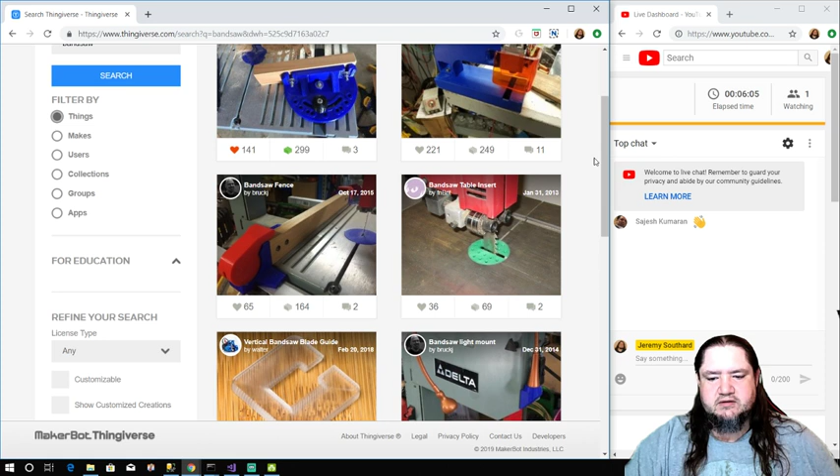So I was thinking, oh, I could design a throat plate for it. But then I thought, well, let me just check and see, Craftsman bandsaw throat plate, if there's something on Thingiverse. Well, the thing about Thingiverse, when searching for things, sometimes you can be too specific on the searches, right? So if I just search for bandsaw, now there's all kinds of things that came up. So here's a table insert, it's not for the right bandsaw, but this one is. So a little over 4 years ago, someone designed the file, and that's what the top of my bandsaw bed looks like. So I didn't have to design it myself, and that's the really cool thing.

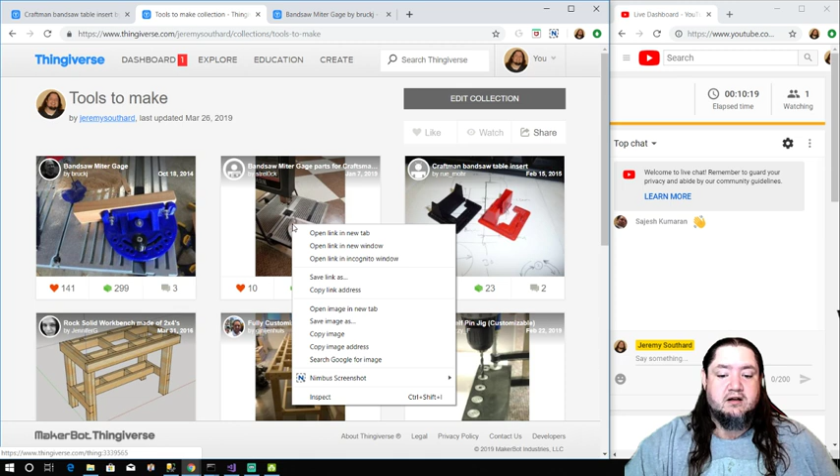Also, my bandsaw does not have a miter gauge, and there was this miter gauge here that this guy designed, but for a different saw, which is fine. The actual miter gauge piece would work except for the track. Well, somebody else already designed the appropriate track for it. I think this is a remix, yeah, a remix of the other gauge. And he says just print the angled piece that rotates, that angles and holds the material in place, and here's the track for it.

So if I decide to make like a circle cutting jig, and I need to utilize the track space there, I could print this track piece. It doesn't just have to be for the miter gauge, right? I can print that track piece and use it for other things I want to use on the bandsaw.

Let me go back to the collection. So there was a couple other ones I looked at before. You know, I have a Ryobi table saw, but it doesn't have the miter gauge either. So here was one that had the proper sized rail.

This featherboard, I printed one of these already in red. I didn't have the right track piece, which is why I found the other table saw tracking. But you know, this is great. Featherboard was like $30, I think, last time I looked them up, and this is less than $1 in plastic. So I have to have the $200 printer, but you know, it's saving money.

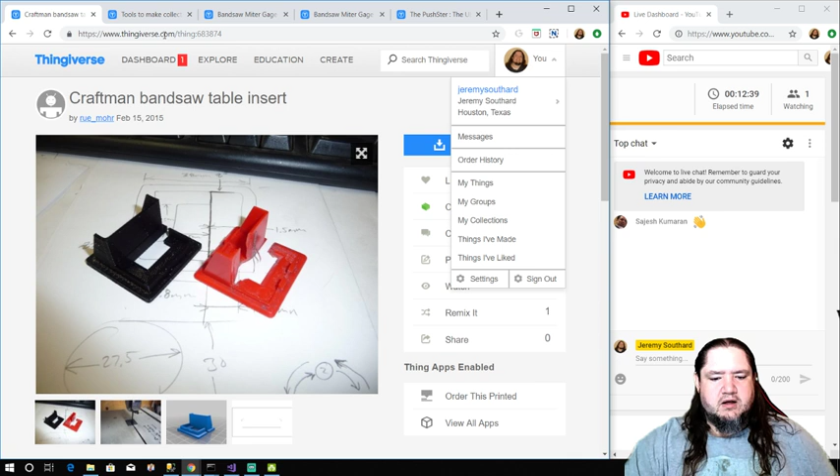So there's a company called Micro Jig, and they create a thing. They have a thing called the gripper, and I saw it at Rockler, and maybe at Woodcraft, I'm not sure if they had it too, but it's this cool - let's see, no, not that one - it's this cool tool that you can use when pushing wood on the table saw so you don't cut off a hand, right? So let's see if this guy has a good picture of it.

Well anyway, basically you've got the blade. Let me see. Micro Jig. Yeah, it's like this picture here.

You know, cutting the small piece of wood, you don't want to be right up on top of the blade. Fingers are important to keep. So what this does, it has an adjustable - that was weird, that was going to make it bigger - adjustable centerpiece, so you can see the side leg is holding the piece to the right of the blade, and this is holding the center of the blade, and this is pressing up against the wood so it's not slipping out the other side, kind of like a featherboard does.

And you just push it along, everybody's hands are safe, and if something happens and the blade catches the gripper, you know, you're still going to be okay.

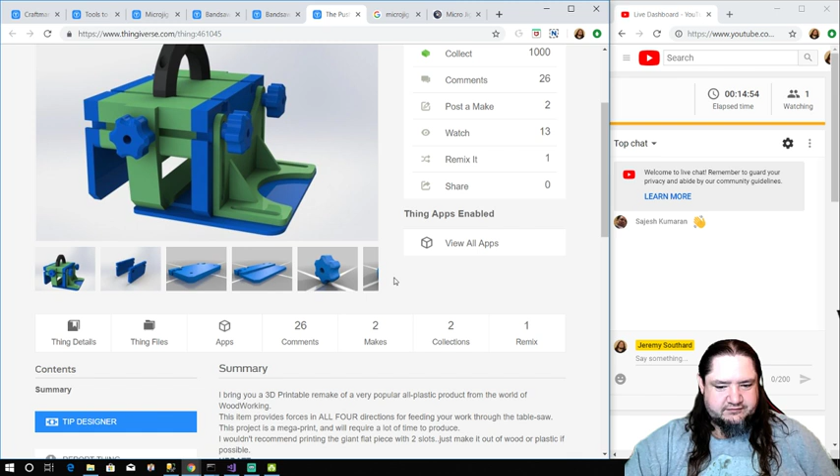So there are a couple of different clones. Here's one, they called it the PushSter, kind of like the gripper, right? And it's got a handful of pieces, and there's a few bits of hardware you need, a couple of, I think, a handful of screws. Let's see.

Well, it doesn't say right here. It might be in the thing files. See if there's an assembly guide in here. Nope. Well, it's not that many, it's like 8 screws or something.

You can see people made them, and even if it took an entire spool of plastic, which it wouldn't, that's only $15. Economically, you make 2 of these, say they're $3 apiece worth of plastic, and one gets destroyed on the saw, you make a third one, you're still out less than $10. If you purchase two of them, it's $160. If you have to purchase a third, you've gone over the price of a 3D printer. So economically, if you print basically 3 of these, you've paid for your 3D printer, and you're protecting your hands, which is important.

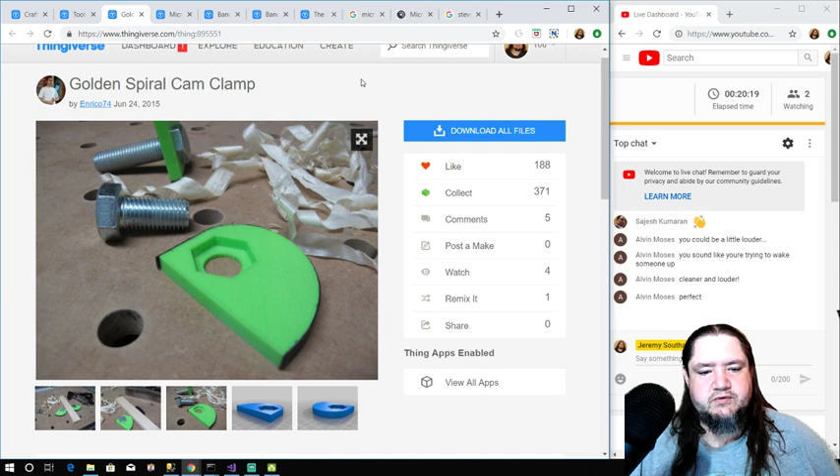So let's see, actually I wonder, I'm not sure what it's. Okay yeah, dog hole peg works out. So here's some different pegs for workbenches, bench dogs. And this one says it's customizable. I like the squares, gives a nice straight block, right? Most of the dog hole pegs are round. I actually turned one on the lathe as a test. I've got a little tiny table with some dog holes in it, like a tool table, and I've used it a few times, but it obviously had a round top that it pushed up against.

Let's see, Tiger says they're generally friction based. Oh yeah, you mean going into the hole, and then it's in the hole, and the thing pushes against it, it's not going to pop out or anything. It's not screwed in, right? Yeah, looking at this particular picture, because it was using the bolts, I thought that maybe it was screwing into something, and from this image I don't think it is, because it doesn't actually look like there's any threading inside there.

But let's see, this says it's customizable. Let's look at this in the customizer and see what kind of stuff can be customized with it. Okay, head type, rectangular or round. Let's see if this image will load.

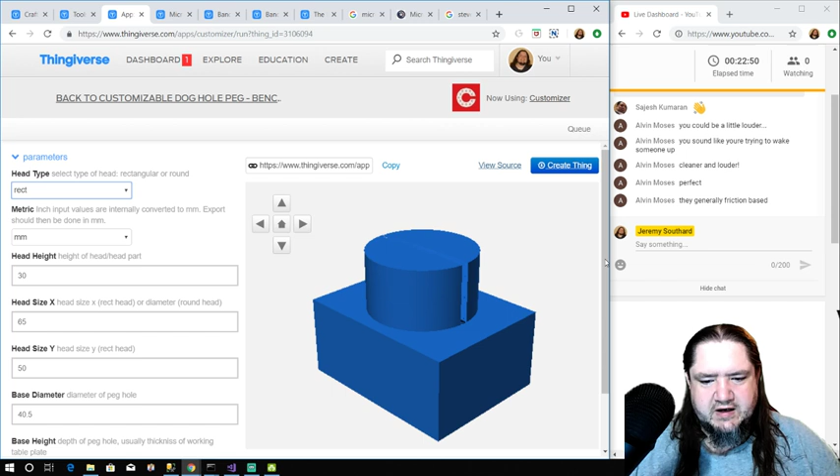So if I had a specific need, let's do a base height of like 120. But if there was a specific peg I needed for something, I could come in here and set up the parameters and 3D print it out, and then it would be good to go. So that's pretty cool, I think I'm gonna save this one in my collection as well.

Let's see, there's another customizable one that looks like it's got a bolt in the bottom. I wonder if it prints in two pieces. Oh, that's cool, yeah, so is it a single piece or two pieces? Okay, it is a single piece, but you pause between layers 31 and 32 to drop the nut in.

That's fancy. So drop the nut in like that, and then it finishes printing the rest of it. And then I guess the bolt goes in. That's neat. Let's see, inspired by QWAS dogs, let's see what those look like.

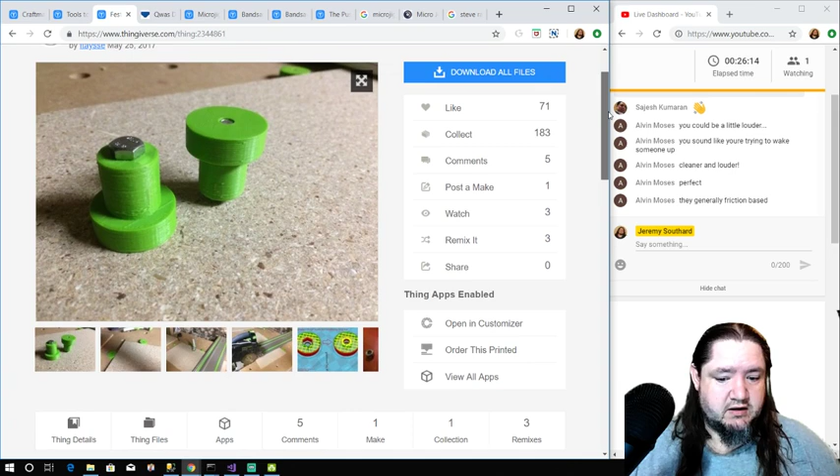Let's see. Holding a workpiece, test the squareness of a workpiece, help in gluing, a small shoulder. Interesting, yeah, I don't know. Tiger, do you have any idea the purpose of the bolt on these?

Let's see, don't have an MFT table, try this. Here's something else in Thingiverse, an MFT DIY drilling jig. That's neat, so it's going to space everything out at the proper widths. So, and that setup is cool too.

Looks like once you get the holes going, this peg piece drops right in, so that it lines it up for the next one. That's cool, let's see. Yeah, so there's half a peg there and two other pieces.

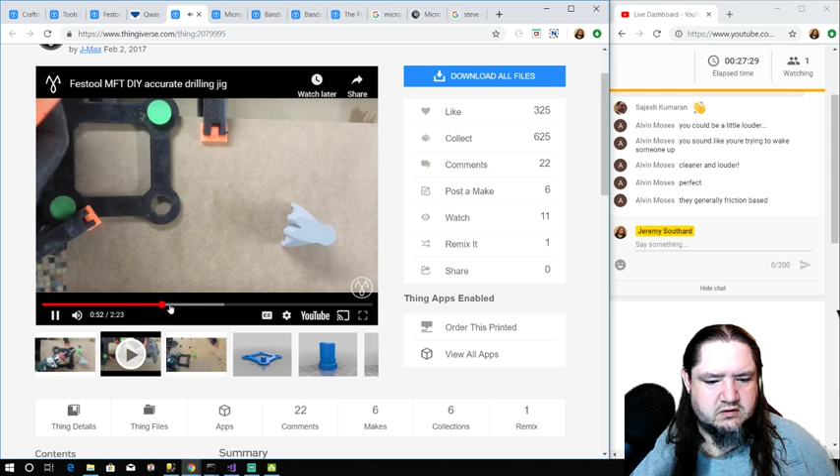Okay, so it lines up for the first hole, clamp it down. Oh, and there's even a jig for aligning the drill bit, that's cool. And then plug it in. Nice, well that's cool, I'm gonna add that to my collection too, that way I'll have the jig whenever I get ready to make the tabletop.

So let's see some other things I've seen in here. These different sanding sticks are pretty cool, different shapes and lengths with the sandpaper attached to them. And then it screws down to get into the different tight places, like the curve on that one, to get inside of a curved area.

Let's see, make sure everything's still running right here. So, and then here's some 90-degree angle clamps. You know, I needed some of these before. I ended up using a piece of wood from Rockler that I was going to use on the lathe, but they're cut really, really flat, really straight 90-degree angles, so I used it as a stop block in the corner.

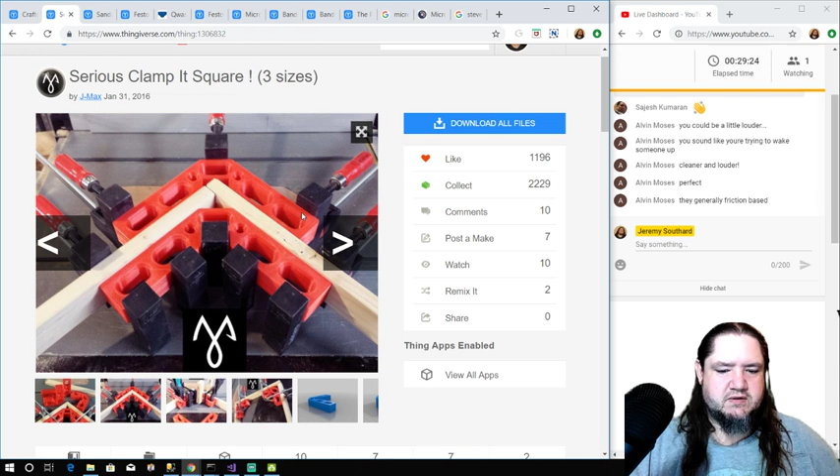Oh nice, inside and out with the F clamps. I didn't see that picture before. But, so again, you know, for some, let's see, wood corner clamps. Yeah, these are $10 a piece, and these would probably take an hour to print two of them.

Maybe 30 cents worth of plastic, if that. It's got the holes in the middle for the gripping using the C clamps or the square clamps. That's pretty cool.

So anyway, there's all kinds of neat stuff. If you know, you don't have to immediately go and design your own thing, you can search for it and see. And that's where we started down this path here with the bandsaw insert. I knew I needed one, and was gonna, like I said, probably spend an hour working on it, but there was already one here.

So that's pretty cool, I think that's enough looking around in Thingiverse for now.

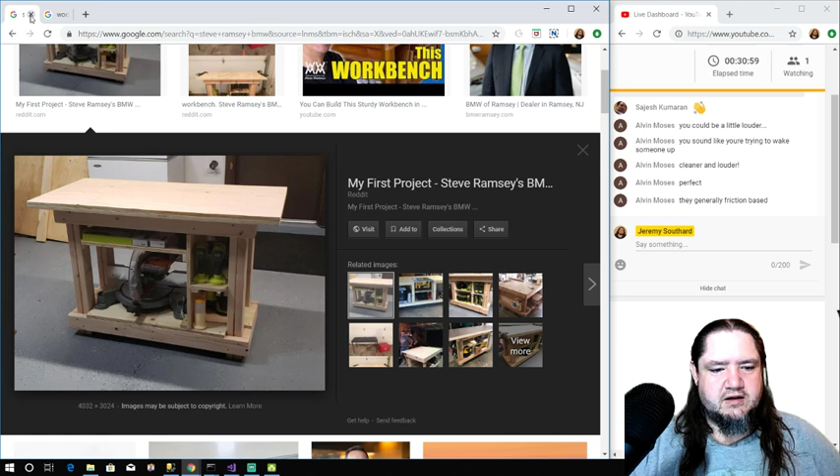One of the other things I've noticed with a bunch of the YouTube videos with the woodworkers is most of them have a brand with their logo or their name, so that when they finish a piece, they can brand the bottom of it.

And I'm working on a couple of things right now that I hope when I'm finished, I would like to have a nice brand to put my mark on the bottom of it.

So one of the things I was looking at with Tiger the other day was there's these brass rods you can get on Amazon, and I saw a video where a guy took the brass rod and carved out the design for the brand he wanted. And Ken at the Makerspace has started doing some metal forging. He made a little forge, and I think melted down some aluminum and a few different things.

But Tiger and I were talking about that. Instead of getting the brass rod, we could actually design something, 3D print it, make a mold from that, and then melt down some brass and pour it into the mold.

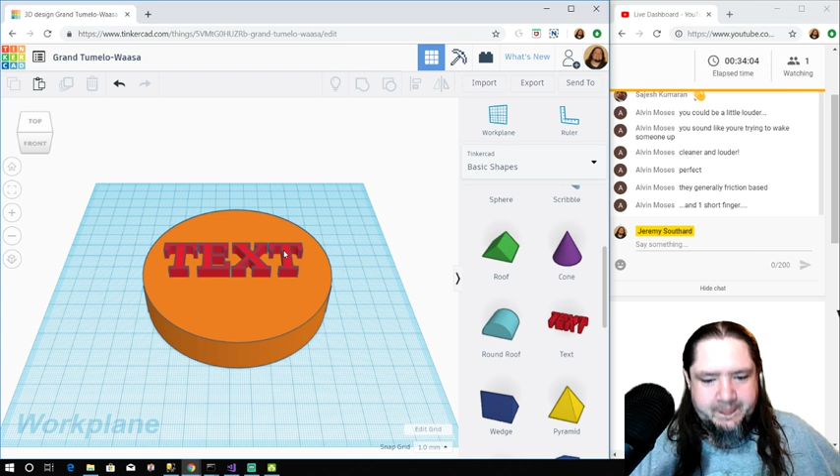So one thing to consider here is it has to be a mirror image, and with designing it in 3D, that's a little bit easier to do it in the correct orientation and then mirror it, as opposed to trying to carve it out and potentially forgetting about the mirroring and making the E the wrong direction, which is probably something I would end up doing. But here in Tinkercad, it's real easy to mirror something like that. See, just one click, and now the word text is mirror imaged.

So this would be 3D printed, and then pressed into molding clay, and then the brass could be melted down and poured into the mold. And then from there, the brass end could be attached to a handle of some kind, and then it's heated up and pressed into the wood to leave the burn.

Now there are some branding irons like this. So here's some on Etsy. This is a custom branding iron, $8 plus, so that's only the iron. I don't know what some of these options are here, but the cheapest actual iron is $30 with 2.5 centimeters, so that's about an inch wide, going up to 15 centimeters, which would be about 5, 6, 7 inches wide or something.

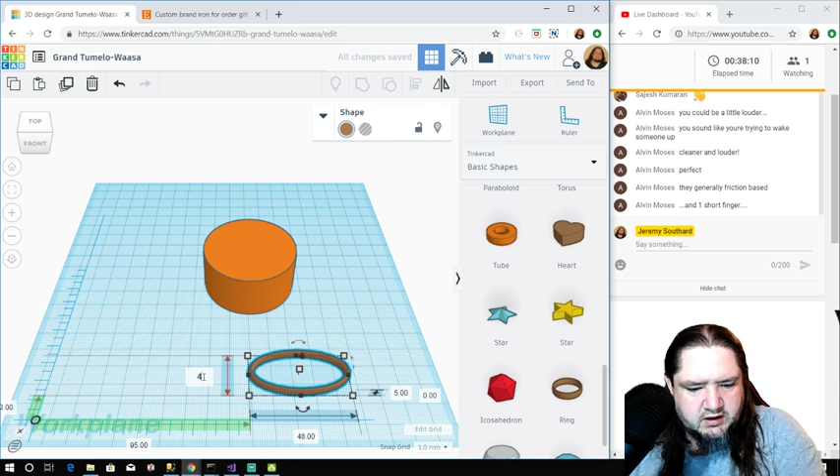Let's see, I'm going to do a ring circle around it. I went to 50, didn't I? So let me go to 48, 48. Oh, that's cool, I didn't realize the ring was a custom shape that could be adjusted. That's neat. Undo, okay.

Let me align these two. Yeah, 24 sides, that's the maximum. I'll leave that as a circle for now. Bring this down here. Yeah Tiger, I saw the octagon, that looked pretty cool. I'm going to leave it as a circle for now, just to have the area here to work with. And I think I want to put this back to make this the same width, and realign those.

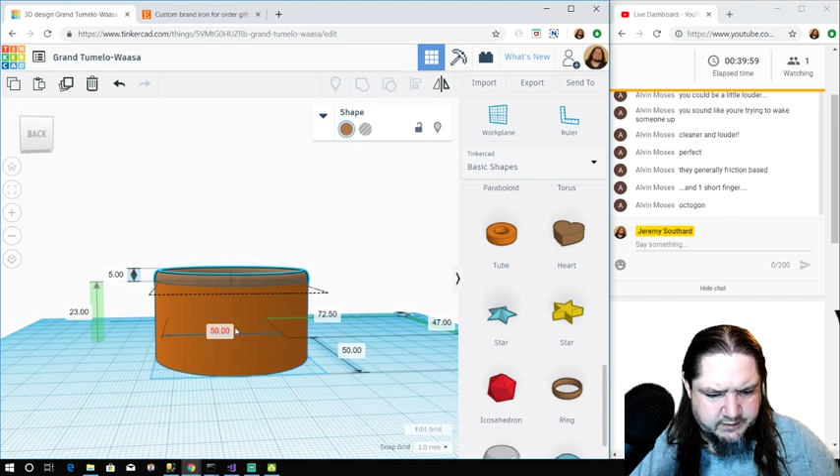And it's 5 millimeters tall, and that looks to be about a half. So 2.5 millimeters above the plane there.

Tiger says, make it thick enough. If you drop it and dent, it won't chip out. Well, I'll want to cast 2 or 3 of them just in case as well.

Now I'm not sure if I can make the text. Yeah, it's fine. I've had problems before with the fonts not exporting in the same way that they look inside of Tinkercad.

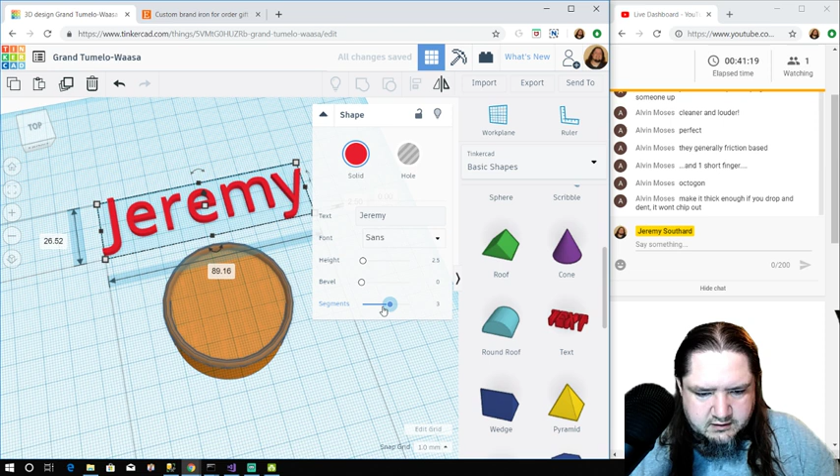But, oops, wrong mouse. Segments aren't doing anything. I'm going to move this over here. Whoops. Let's see if I go down to... Nope, I didn't want that to crunch inside.

Let's see. I feel like that's not as thick as I thought it was either. Let's see if I can align these together at the top.

Let's see, is there a way to hide this right side? Yes. Okay, that's better. Let's see, so that's still 1 millimeter above the bottom plane. So that's going to have to be a height of 6.

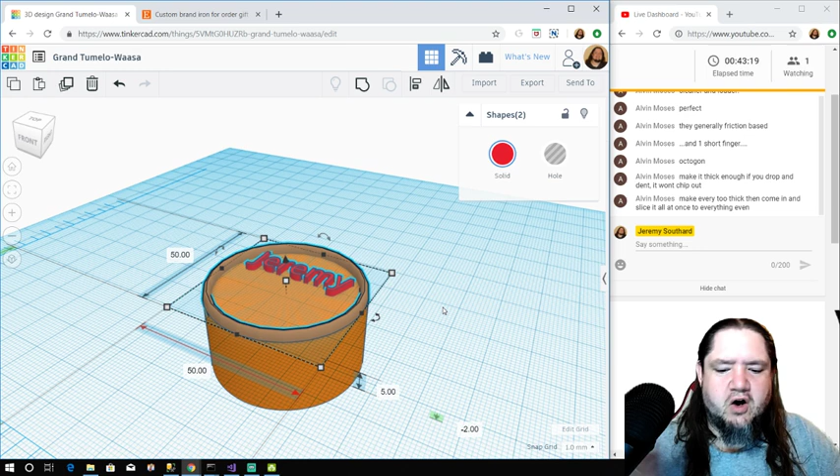So I will... Where did the settings go? There we go. So yeah, make it super tall. And I think instead of the ring, I'm going to do another cylinder.

Come on. It's not wanting to line up. I'll do another cylinder and then make a hole.

Sometimes this alignment stuff is funky. There. Bring that one way up. Copy it again.

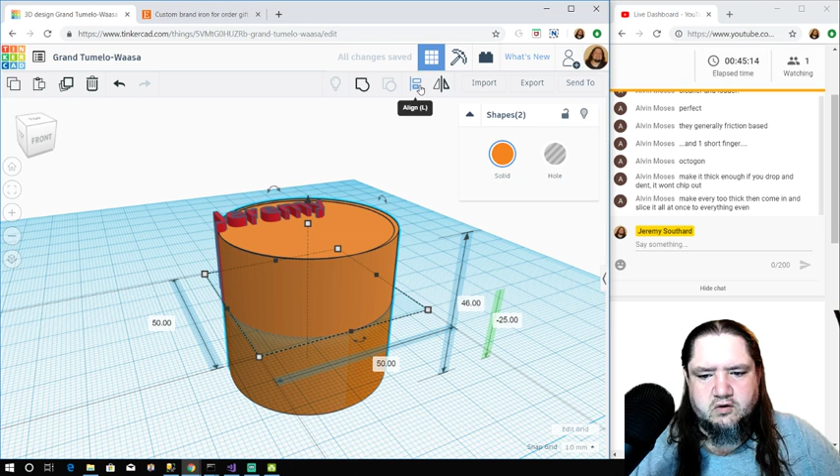Make one of these just a little bit... 48... realign with the outside and make this one a hole. Group those two.

Line it up there. I was also thinking about, I have a lettering kit and I think they're made of steel. I'm not sure if those could be heated to do like a date.

For like a date or a piece number or something. You know, if I make 10 bowls, I could label them as a set or something like that.

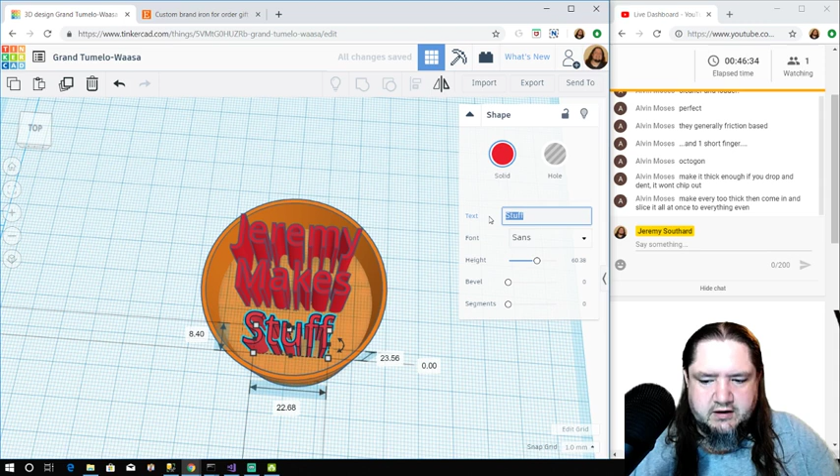Oh, you know what? I didn't do it in all caps. Thought something looked weird. Tiger, I know you like to tease me about the caps.

Let's see if I center, oops, the word makes. And let me grab stuff. 1, 2, 3. And this one, 2, 3.

That's pretty cool. There's still a little bit of room here. Let's see what else I can add at the bottom.

Some kind of a little flourish or something. Yeah, I'll flip them after we cut it down.

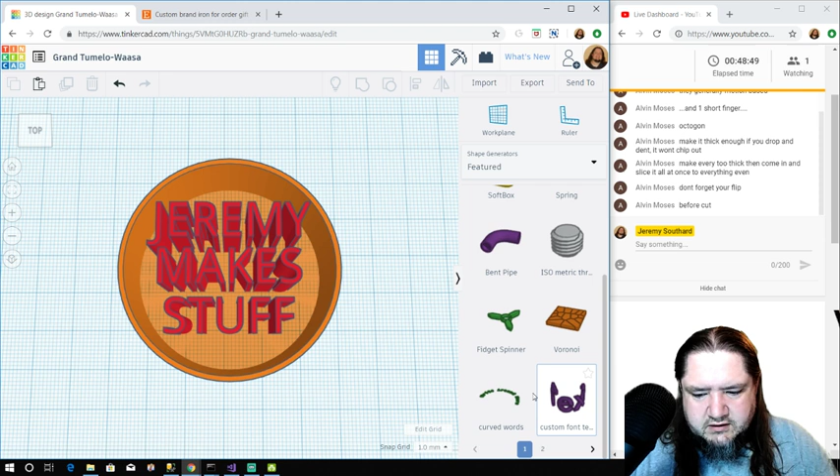I guess, yeah, the cut should be the very last thing that happens, right? Oh, there's curved words. Let's see, what would that look like? That would get too big real quick, I'm sure.

Let's see. Drop that out of there again. Lock those.

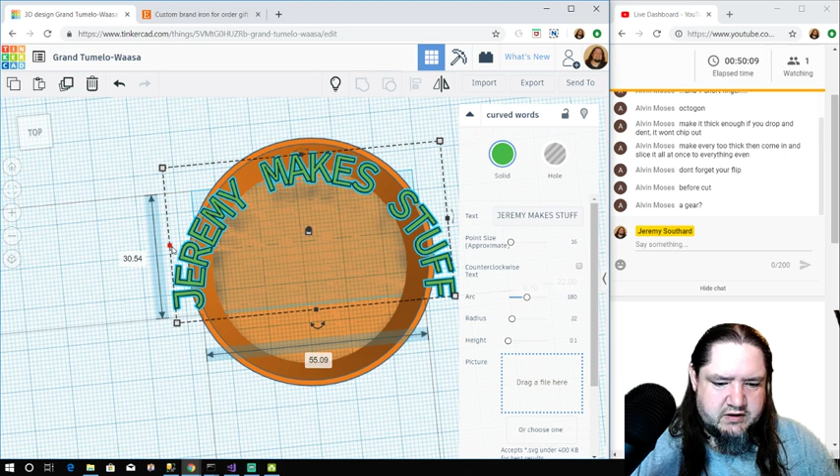Yeah, maybe a gear or a... and then bring the teeth to a point. It might kind of turn out like a saw blade. So yeah, this is a little too squished to be inside of a circle.

Let's see, I know there's some gears in here somewhere. Are there? There's pages on some of these. There we go. I wish there was a way to search.

And Tiger says put 2019 at the bottom. Maybe. Like I said, I want to look at that lettering kit again too and see if maybe I can use that to do dates and things.

That's too far. Can't quite get those pointed. So more teeth is closer.

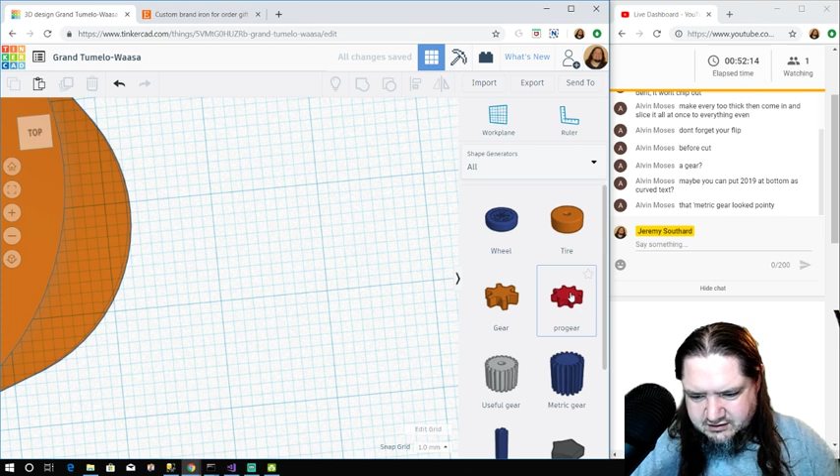It kind of looks like a good job sticker from kindergarten. Let's see, that metric gear. Oh yeah. Oh, and that has a pitch on it too.

I feel like I'm really zooming in close. I don't know what this module means. Oh, okay, that's like diameter or something. Or some calculation with height and diameter.

What just happened? I think I clicked. Let's see. That's kind of saw blade like. What? It's like it's changing.

Let's see, add a bigger circle and leave the pointy bits. Let's definitely want to take a circle out of the middle, right? And see, it changed again.

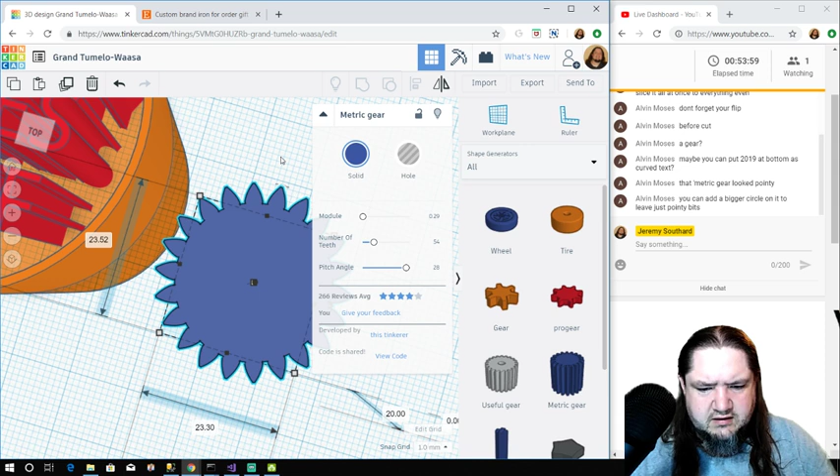I'm not sure if that's going to be predictable. Right, that's not 54 teeth.

Let's see, back to the circles. I don't know why the alignment's acting up. Smaller.

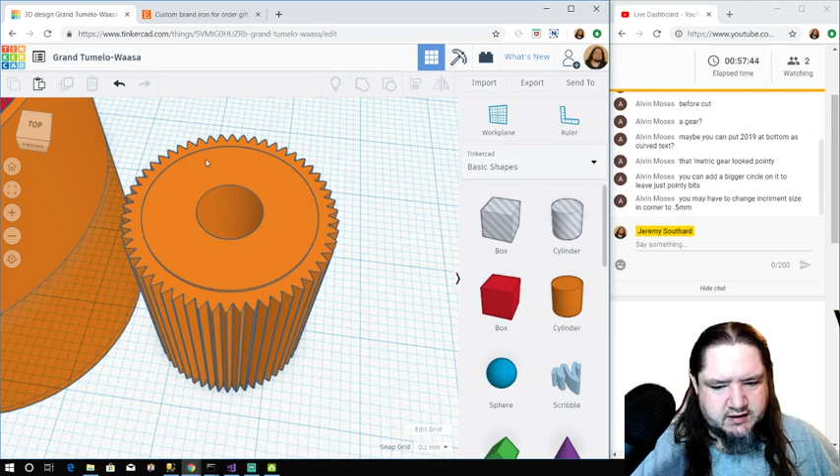What do you think, Tiger? Is that saw-like? I know when it cuts down, that outer circle's not going to be there. But I feel like that's keeping the teeth in place from that generator. See, maybe over on the side or something like that.

You know, that wood grain on this one looks really cool. I don't know if I could work that out. That saw looks really good with the gaps in it. It really looks like it's moving.

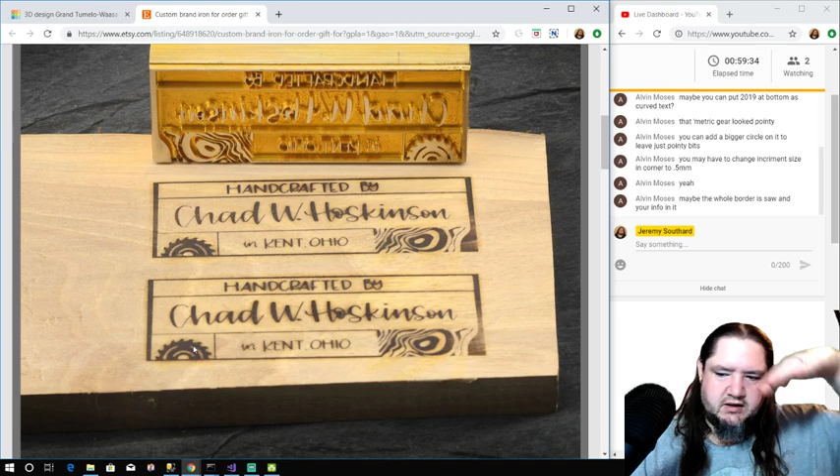Which, by the way, when I was replacing the blade on my new bandsaw, the blade came out of the package, and I put it in, and then I was cutting a piece, and I was having some trouble, and I looked at it, and I figured out I'd put the blade in inside out, and the front of the tooth was facing up instead of down, so I didn't realize that a bandsaw blade could be turned inside out.

Let's see, I wonder if maybe... Let's go to Thingiverse. Search for saw blade. So here's like a buzzsaw blade, right? Here's saw blade art.

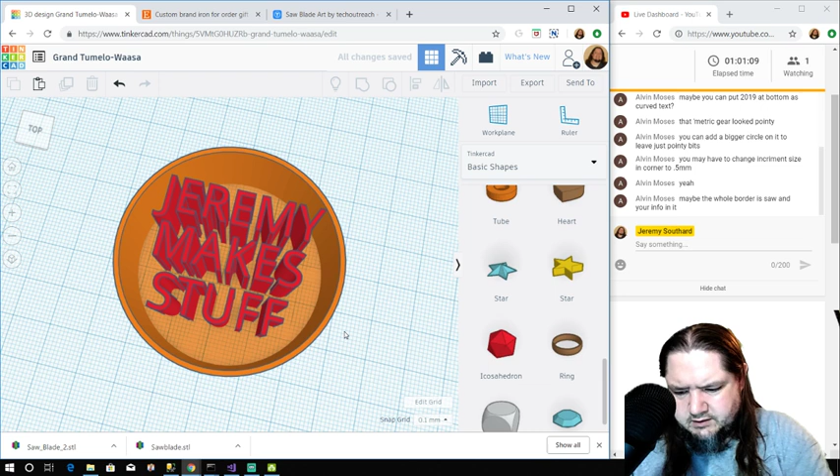Look at this one. Yeah, let me grab that file. So there's saw blade 2. Should delete that. And import in saw blade.

Oh, it's even flat on the one side. Which would probably be the better side for me to use, right? Because... get around there. There we go. Because that's the shape. Because the additional geometry isn't going to really burn into the wood.

Let's see, so this was 50 by 50. Bring this down to 50 by 50. Need to make that the inside hole bigger, right?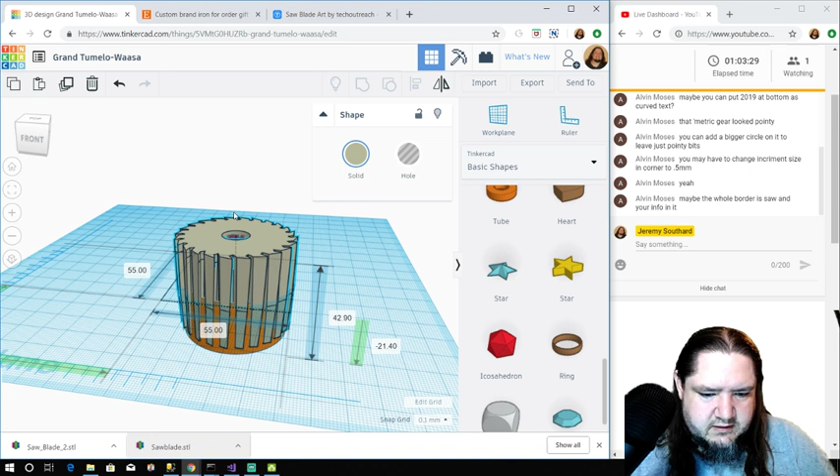Let's see, I wonder if I go ahead and... oops... chop this one from the bottom and then extrude so it'll be a flatter side. This piece, group.

Yeah, that's better. So it's a straighter piece to work with there on the edges. See, I think I want to group these words together too before I change anything with those.

Alright, bring this back up to height. And I'm going to align that. I don't think that moved. Okay. Lock the words again. Let's see, what did I do?

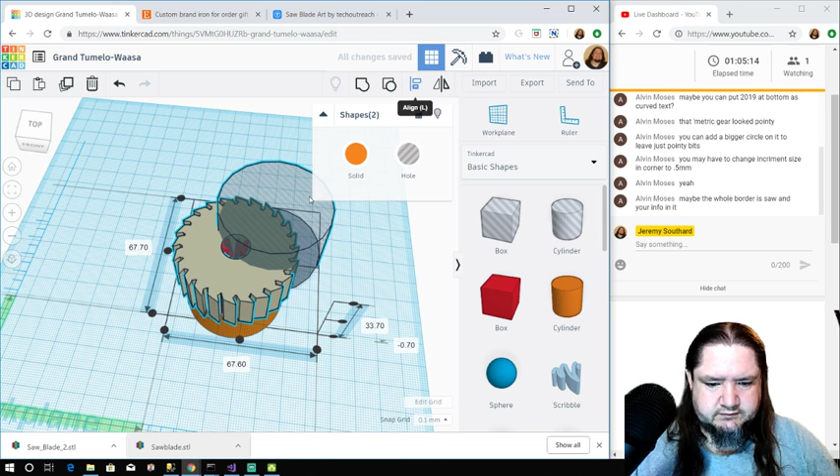55? Yeah, so let me do this as 50 by 50. That. So that was a little big. 48. Because I don't want to cut off any of the teeth.

Group those. That's cool. And I kind of like the letters going into the side there. Ungroup, give that center hole more sides.

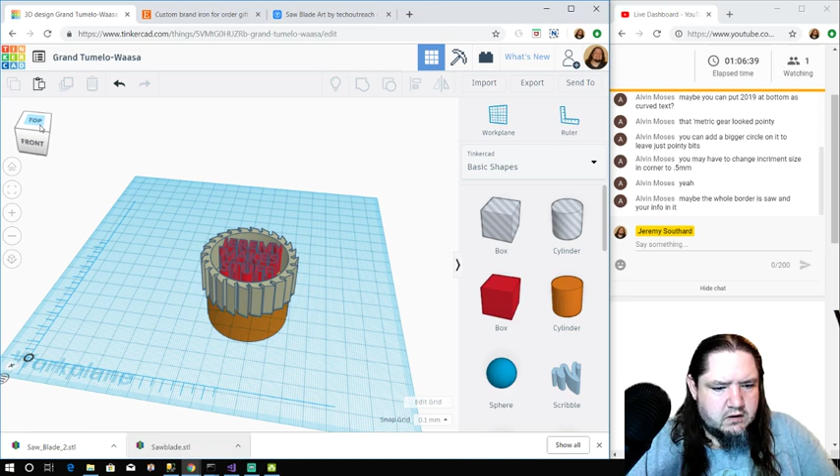So if I make sure these are centered, looks like it is, or it was before I shifted it, I guess. And then now I'm trying to see if I can get a little extra space either on the top or the bottom, to maybe add some kind of a flourish or something there. Just realign it.

And let's see, go back to the generators. QR code would be neat if it wasn't so big. I don't know, does anybody really use QR codes anymore? I saw one on a sign earlier today and I was thinking about that.

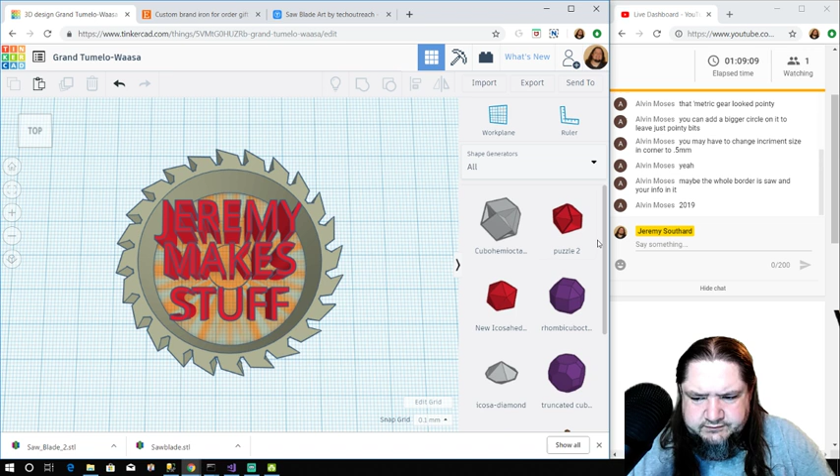Yeah, I could put the year there. That also means every year I'll have to make a new one, right?

Thumbprint. That might be neat. I'm not sure if the actual print would come out. Oh, you know what? I'm gonna look and see if there's a Texas.

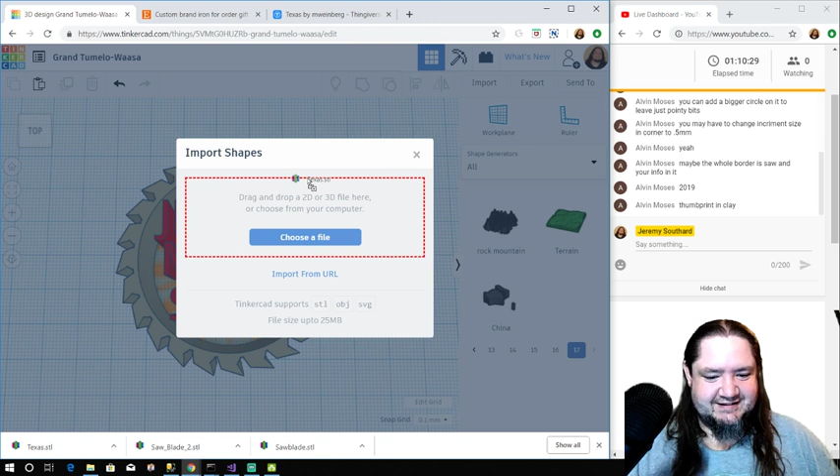Let's see what that would look like. Yeah, little Texas. Oops.

Oh, that worked out nice too, because that's just an outline, kind of a thick outline.

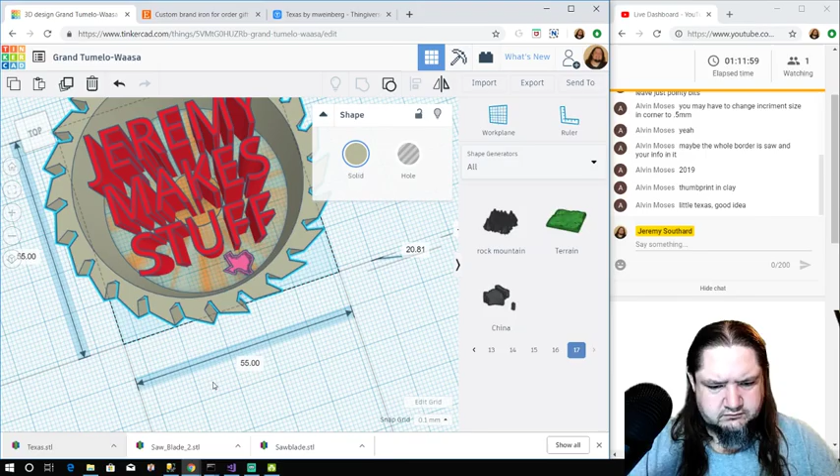Let's see. Oh, it's kind of plain with just that though. Now I feel like I need something else over here on the left.

Let's see, I wonder about shifting these letters around. That'll give a little more space.

HF and a heart, Harbor Freight. You'd think as often as I go by there that I might do that. Yeah, I like that. It gives a little more room for some extra stuff here and there.

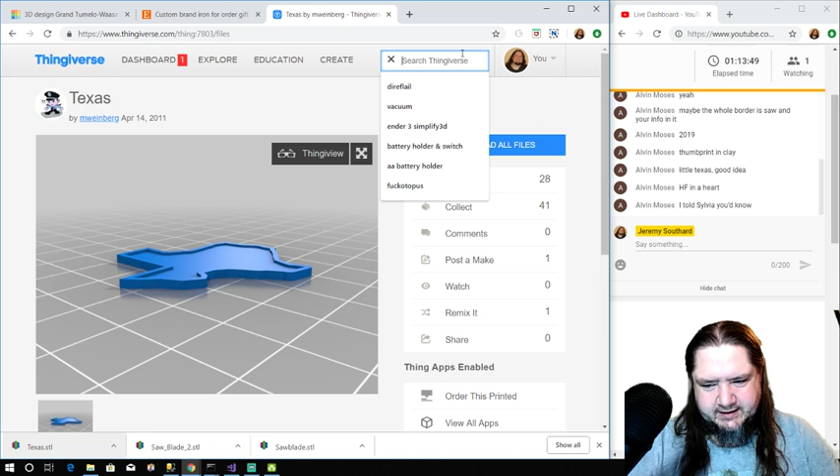Let's see, I was wondering about maybe something else channel related, because Texas isn't necessarily anything about woodworking. I don't really want to add a 3D printer outline or anything, I think that's a little too much.

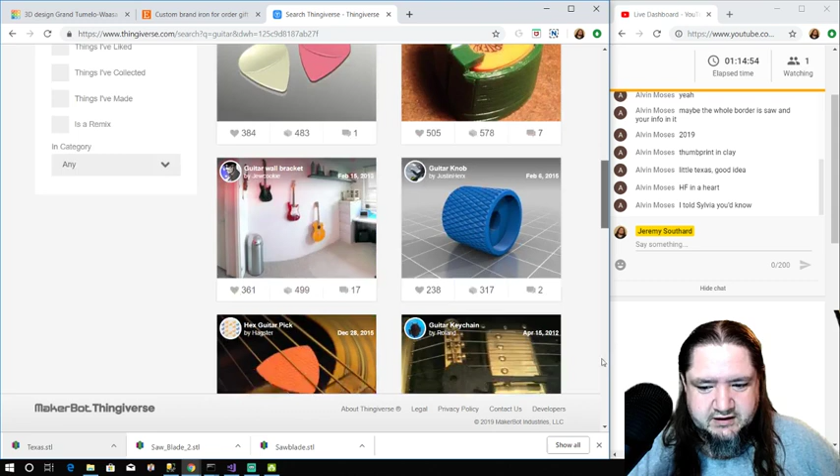Oh, maybe a guitar. Let's see, here's a little guitar keychain. That's kind of neat.

Oh, the YouTube play button. Yeah, maybe.

I mean, it's really only two pieces, right? A rounded square and then a triangle.

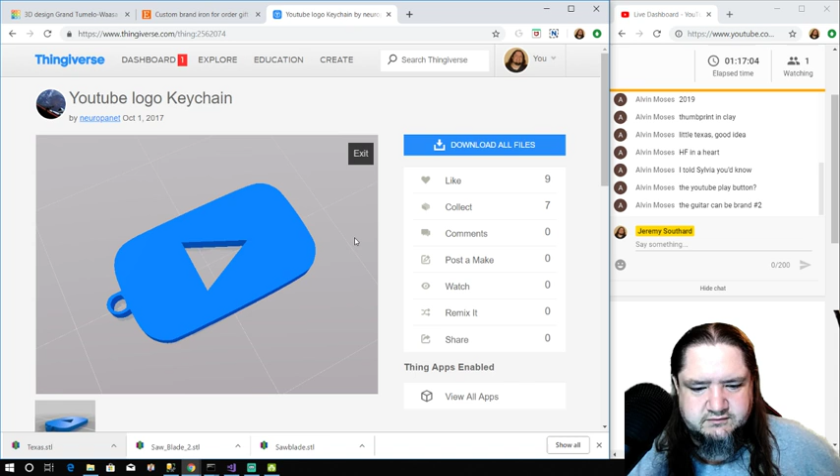I have the outline and the triangle - instead of the red piece being the brand, it would be the white. What do you think about that? Sort of a kind of a negative. Oops.

Let's see here. Yeah, I'll use this to make the hole, but I want to take the loop off the side first.

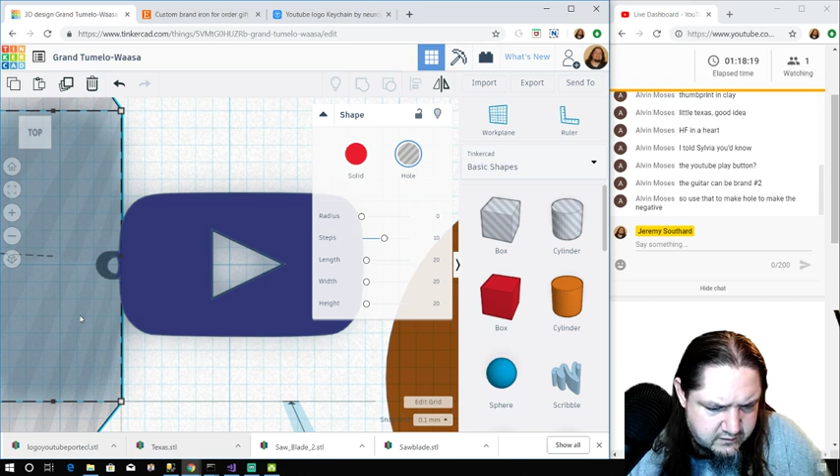I'm actually going to turn the grid off and move it pixel by pixel. Right about there. Oh, so close. Come on. Perfect. Hi, kitty, there's a visitor here now.

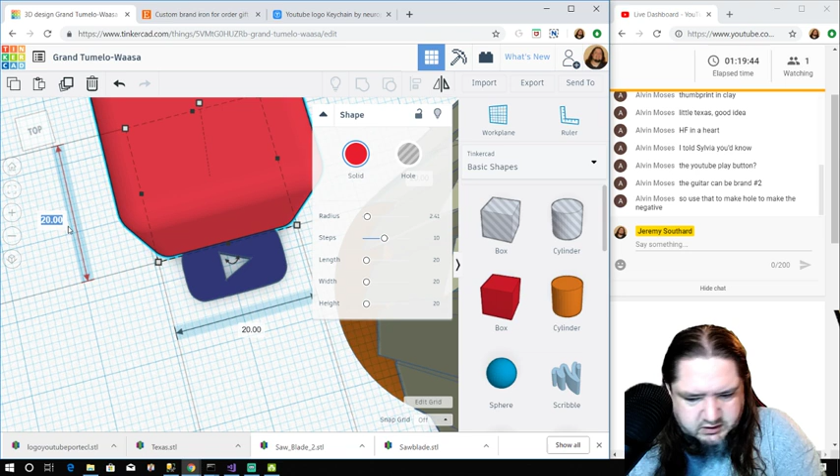So now I want to make a box. Let's see, how big was this? 13.69 by 8. So what is that, like 2 by 3 and a quarter or something? So that would be 7, yeah, 14. That's probably good.

Turn that into a hole. Let's see if I get these two aligned here. Right there.

Barely small. Now we'll see if this works. I'm gonna do 2 holes.

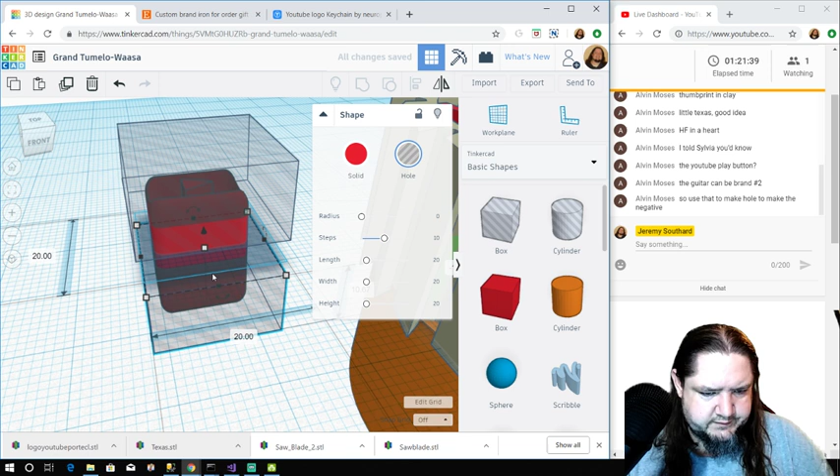Okay, so the top and bottom were a little thick. Let's see, which one's the width right here? We'll go to 9. And then align those two.

Try that again. It's not bad. Maybe I'll bring the sides out a little bit. Let's see, that is 13.9 and 14.25.

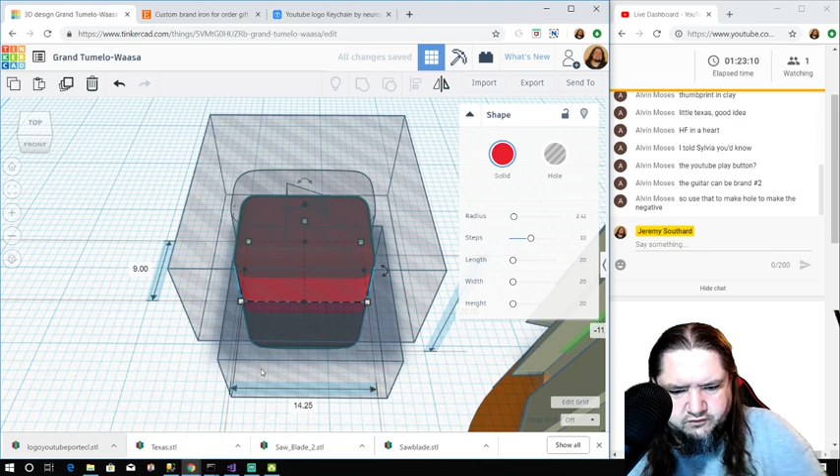Realign. Group it. Group it. Let's see, I'll make this yellow for now. Rotate this a little bit.

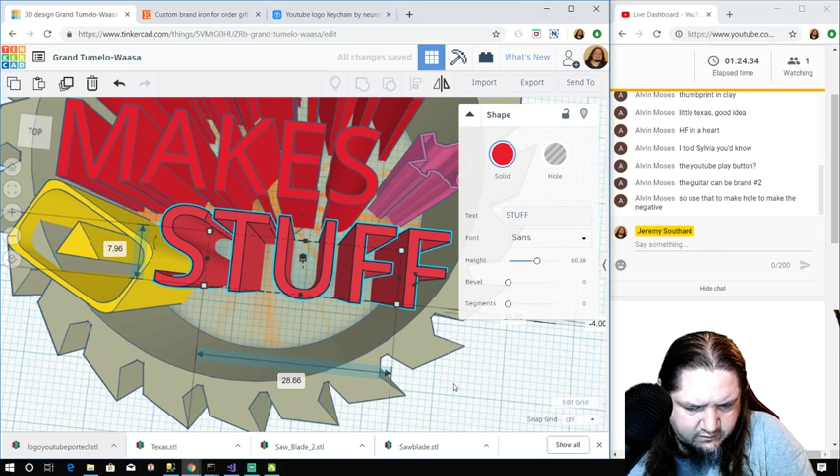Oops. So there's a YouTube logo going into the saw blade. I think it's kind of cool. I'll make Texas just a little bit bigger. Got the space over there.

Let's see, I'm gonna group it all and do a slice real quick and see what it looks like. That's cool, what do you think about that? See if I can find a good color to see what's going on there.

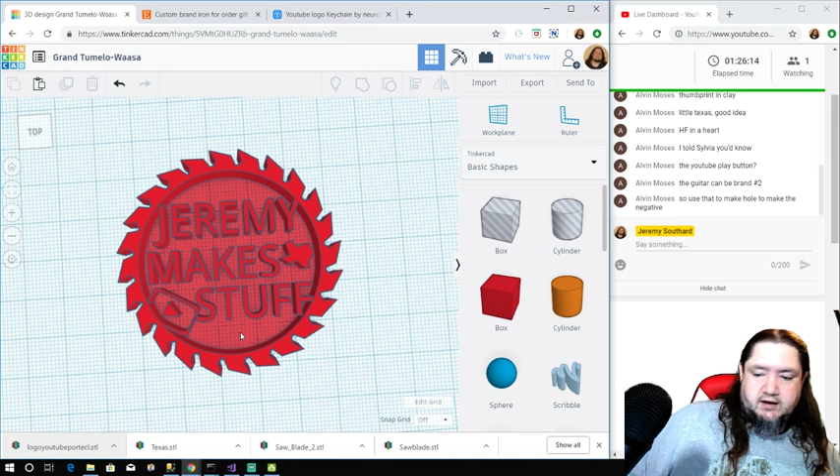What do you think, Tiger? And there's still enough room down here to put 2019. Hi, kitty. Yeah, I like that. Tiger and Sylvia like it.

Let's see, I'm still not certain that text is going to stay in that font, because like I said, I've had font change on me before. Nah, text is - oh, when we grouped it? I don't think it did. I'll check again here in a sec.

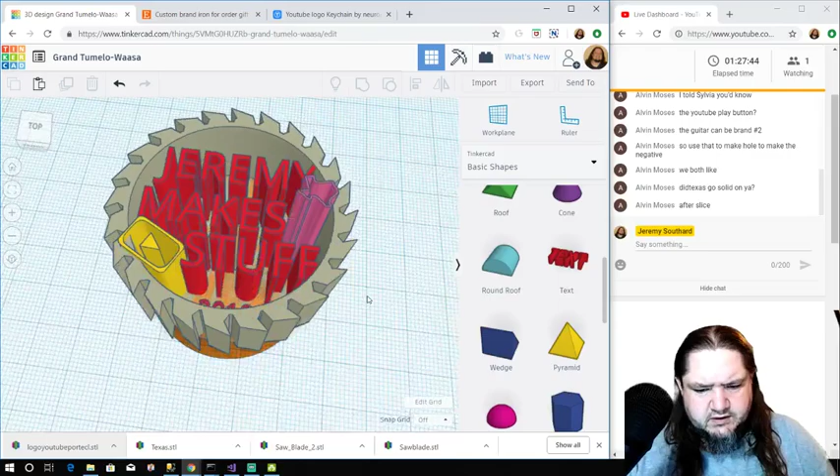Come on. Yeah, after the slice we'll check again. There is a base in it, so it might have been too tall. I might need to slice it like I did the saw blade, and down and up.

Gotta have those sound effects. Let's see if I should - oh, you think a separate small brand for the year?

That way - well, that's what I was saying. I have a lettering kit that, you know, with the heavy mallet, you put it on and hit it and it leaves the number. I was wondering if I could heat those and use that as a brand, or use those to tap in the numbers and then wipe in some ink or something. I don't know.

Let's see, let's adjust this Texas here. There's more below it.

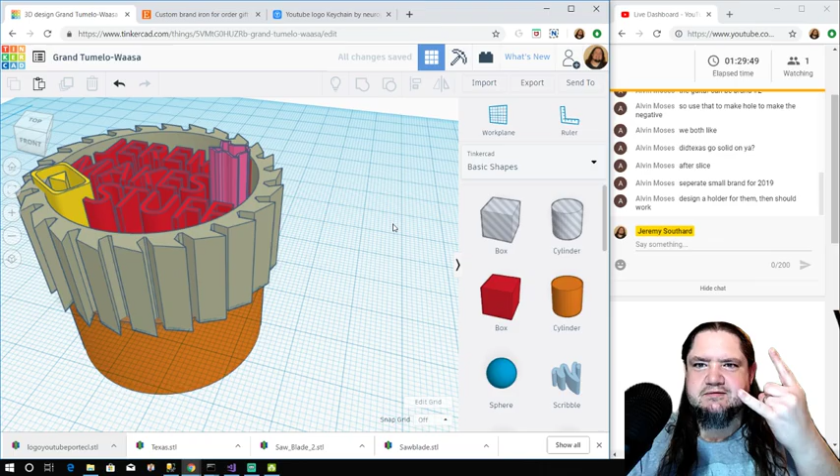Okay, so that's hollow for sure all the way. Group everything again. Oh, the printer just kicked on.

Whoa, the box left. Ah, come on. Make this one bigger.

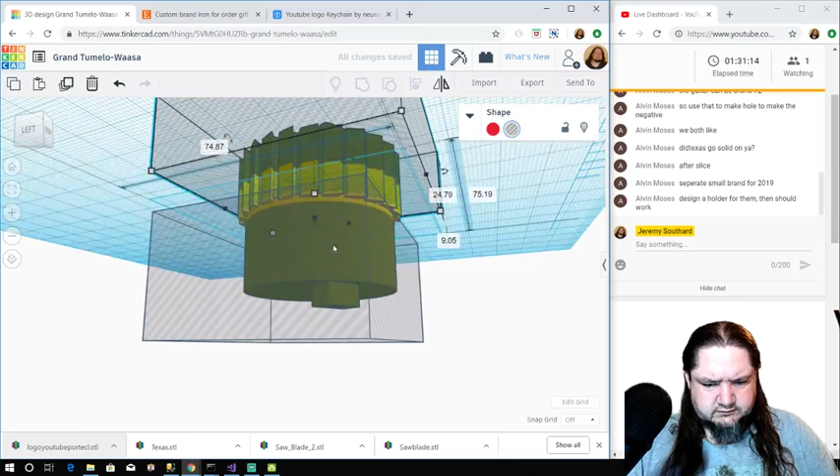All right, let's see. Nice.

The whole piece is about 2 inches in diameter, so that should work, maybe a little bigger. That's a pretty good size. The only thing I've done that's maybe a little bit smaller than that was a ring holder, like the first real thing I turned on the lathe.

Cool. Do you think those walls of the Texas are thick enough? Probably, right? Because it's going to push down into the molding clay. Alright, well...

Nice, let me export this. It's an STL file. And Simplify3D. Come on.

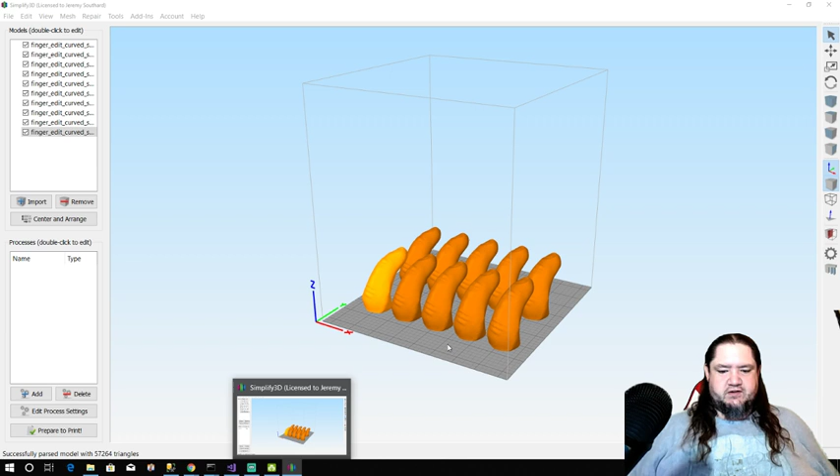Open 2 copies. Oh, there's the fingers to be printed. Let's see if that turned out. Yeah.

I don't have my mouse with the scroll wheel, but cool, I think it's gonna work out. Alright, I just resized it, but you know.

Yeah, mirroring, that's right, so I need to mirror the text. Let's see here. You know what, give me just a second here. I need to... that's not what I wanted.

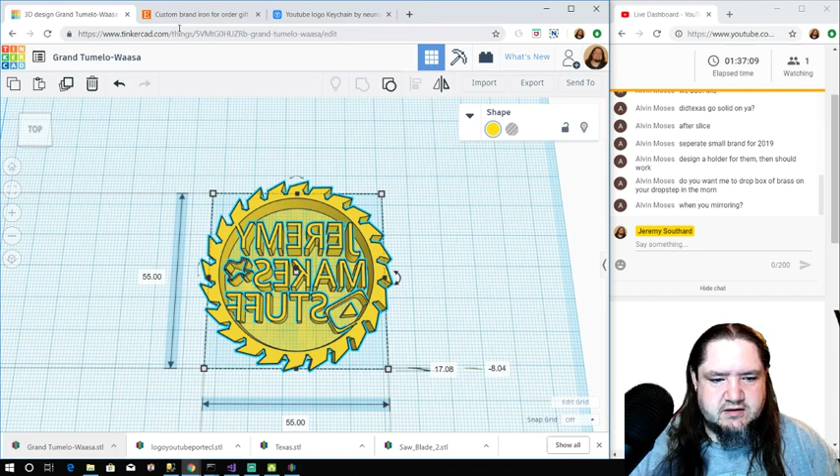The mirroring wasn't too bad. The mirroring options in Tinkercad are neat, and they show you the actual arrows that you want it to flip on, right? So you just click on the thing. But for whatever reason, I always do the wrong one first.

Let me download that again. Now, since I have it here in Tinkercad or Simplify3D, if I wanted to mirror it here, let's see, there is an option here somewhere. Mirror mesh, and then you tell it on which axis.

Right, so that did it as well. But I would rather have the actual model mirrored so that if I reprint it later, I don't print in the wrong orientation.

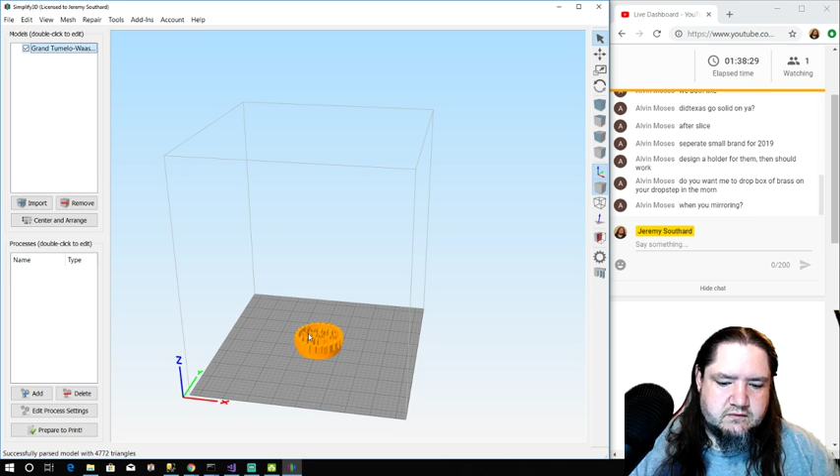Let's see, let me move this back over here. That looks pretty good. I wonder too, since the teeth are kind of hanging over...

So I think, so that I don't have any drooping. Let's see, how do I zoom in without the mouse wheel? There we go. Even though the bottom here doesn't necessarily matter for the print, because it's going to go into the mold, still I don't want those drooping, and I don't want to just add a bunch of supports. So I think I'm going to adjust it so the blade goes all the way to the base.

Let's see, so ungroup, but I'm not going to change the orientation of anything. Ungroup, there we go. And just pull that straight down. And group all the geometry, and now group it all with the holes.

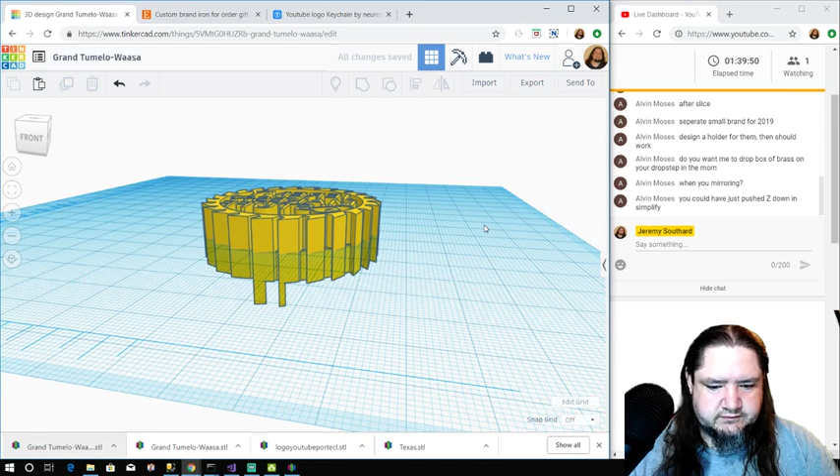Yeah, I could have pushed the Z down, but I still want the copy of the model that I have to really be the final piece, right? Because over here, if I push the Z down, here, and then maybe not uniform scale, but bring the Y up.

Come on, I said not uniform scale. Nope, not the Y, I'm crazy, the Z. Right, but that still starts to stretch things, kind of weird, I think.

And now I'm not really certain about how tall it is, and I'm not really sure how tall I need the print to be either, really, until you give it a shot. But anyway, I just want the STL file to be set up so that all I have to do is drop it in and tell it to print.

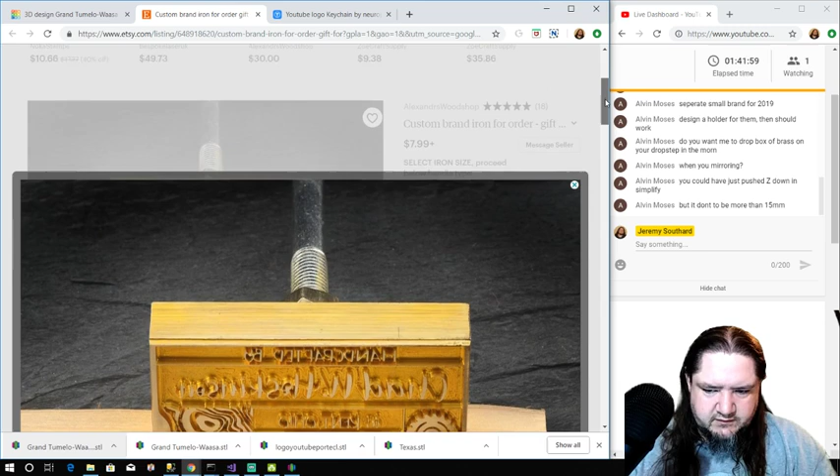I wonder, so on this Etsy shop, they've got this plate on the back with these screws, and then it goes to this nut, which has this rod.

I wonder if as the brass starts to cool, I could place a bolt in the center and the back, push it into the brass a little so it hardens around the head, then use a nut or something to make a handle so when we heat it up, we push it against the wood. Because what I don't want to do is just make this brass circle and then have to figure out how to attach it to something.

These screws they used on this one are really small because they don't want to go through the brass to the actual brand. This looks like some kind of brass plate with the nuts and screws on there. So I wonder if I can bypass that whole piece by shoving a bolt in the end while it's cooling.

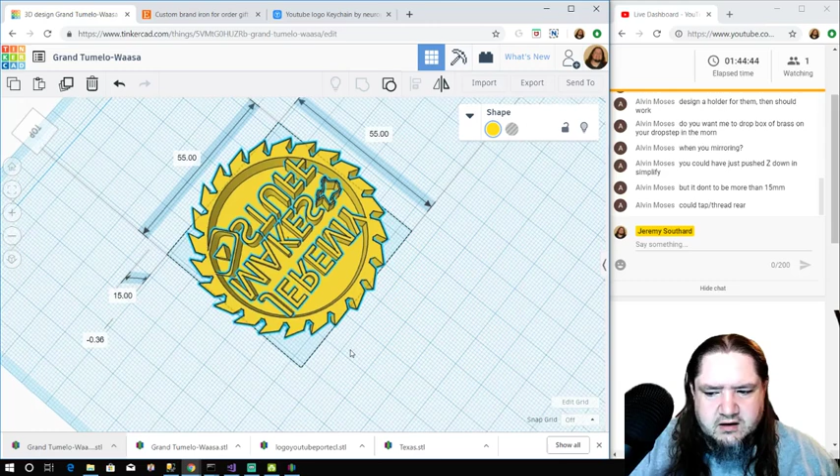And I wonder, maybe there should be, not as part of the print but when it goes into the mold, is it going to need any escape holes for air and things like that? So what am I trying to say?

See, Tiger says he's doing 3D, you're going for 2D in reality. That's true. Yeah.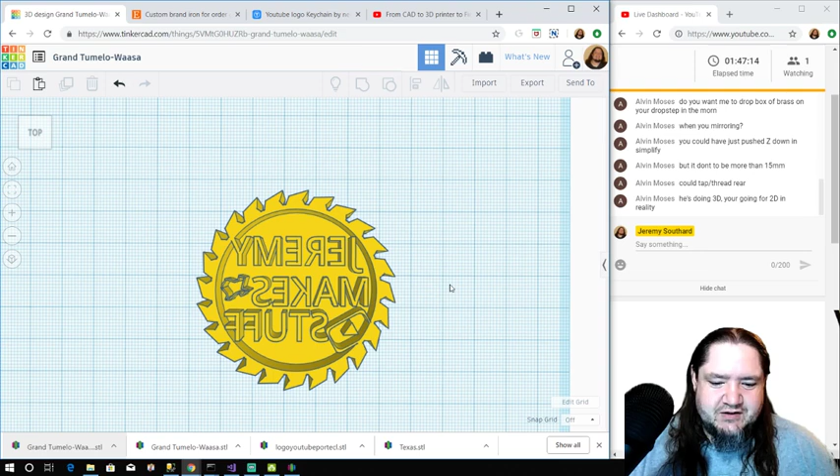Cool, I like that. I like the Y connected over there, like the YouTube play button coming out of the side.

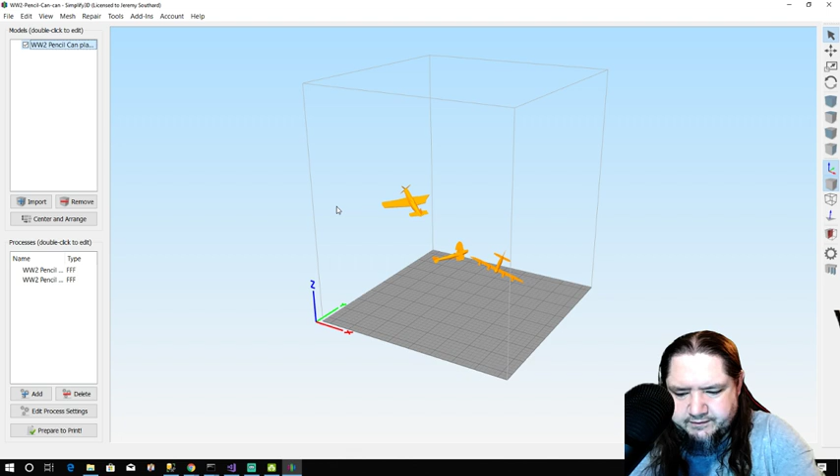That is something else I've found interesting in Simplify 3D. Something easy to do is once you get everything set up with all the different processes, you can save the factory file. So that way, if you accidentally delete 2 or 3 processes, or you change them too far from the perfect settings, it's like having a backup. Unfortunately, I was not very diligent about doing that myself.

Let's see, this is the Creality Ender 3. The layer height doesn't really matter too much on this, because it's just a top layer and it's going to be solid anyway. Always do a skirt. I'm going to leave the infill, there's not too much going on there. I'm going to put it at 100 just to see what it says. I don't need any supports. That's too high.

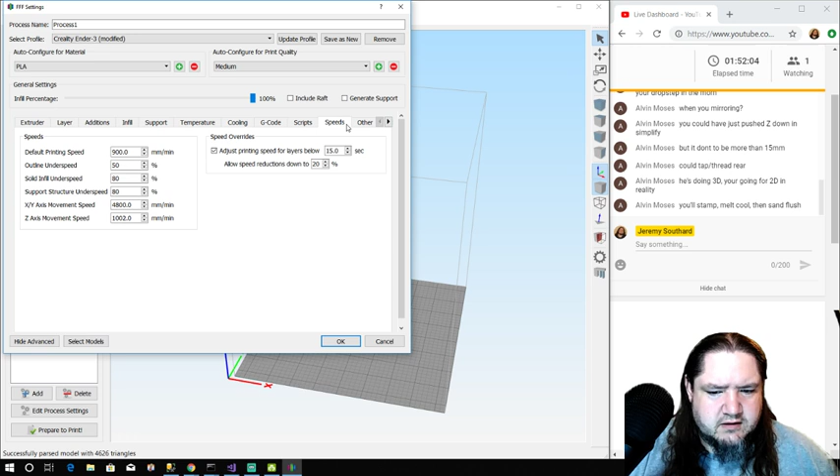Oh man, this means I lost my custom script. Well, I can recreate it. I'd made that custom script for doing the 3D printing with the fabric, so it would stop at a certain layer and I could put the fabric down. But alright, let's save that.

Hey, there's my base back at least. Let's see. Oh Tiger, you said you'll stamp, melt, cool, then sand flush. Yeah, so the top layer of the stamp that actually gets hot will have a nice smooth top, right? So if there's any issues, I guess I can just keep sanding.

4 hours and 26 minutes, and that's with 100% infill. But I wanted to see - oh yeah, I was worried about that. The Texas outline and the rest of the outline of the play button did not appear.

So I'm going to change the layer height and... let's see, I don't remember if there was a second setting. There was another setting I changed before when that didn't show up. Let me see if just the layer height makes a difference. I don't think it should, right? Because the layer is top to bottom, not left to right. Yeah, so there was some other setting.

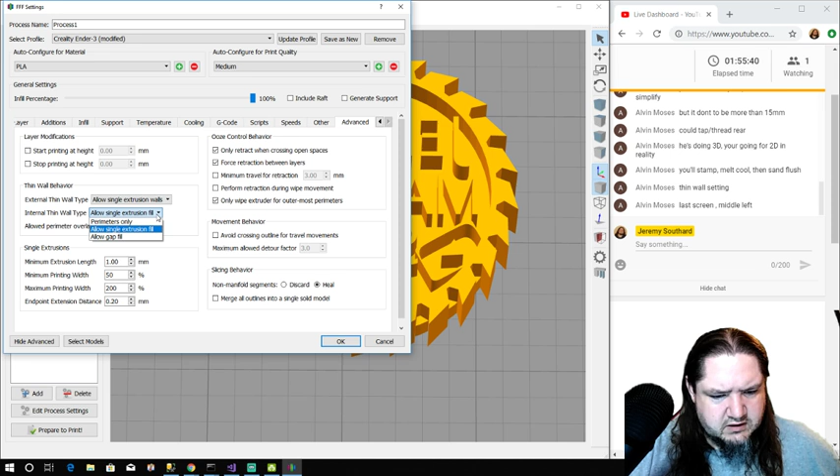Last screen, middle left. Advanced. Thin wall behavior, allow single extrusion walls. Single extrusion fill, let's see. There we go, yeah. Thank you, Tiger.

There's still some pretty big bulges there in the letters.

Internal thin wall type, let's see. See if one of these settings will get rid of that. Turn off braille feature - is that what it's really called? That's what I'm looking for.

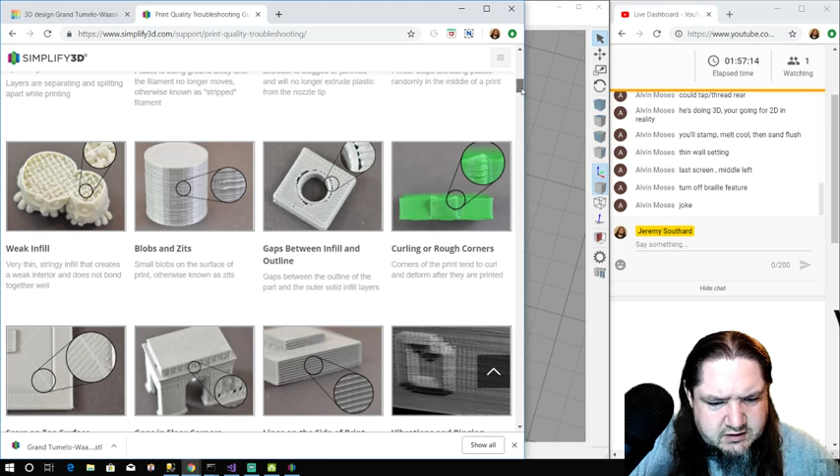I mean, not that. I don't remember ever seeing something called braille feature. Yeah, I thought so, thought you were joking about that, but yeah, there's got to be... just so much faster for me to look here. It's not the Blobs and Zits one.

Yeah, see, that percentage does something. Yeah. Well, let's see, let's put it 100% and see what craziness happens. Oh, that - there wasn't really any craziness. That fixed most of it. That was weird.

Let's see, Tiger says try 85%. Well, usually I would just go to an extreme just to see what changed, but that took away so much of it - took away all of it, almost, except for a couple of key points.

But yeah, I don't really see a change. Let's see what allow gap fill does.

Oh, in the settings... where is that setting? 2, so try 1. Oh, the outline perimeter shells. Okay.

That only changed the outline on the saw blade, though. These are still 2, right? Well, I guess that is 1. It did change it in the play button - now it's infill inside instead of a second one. So I guess the letters are already 1 perimeter.

Let's try inside out instead of outside in, like my bandsaw blade.

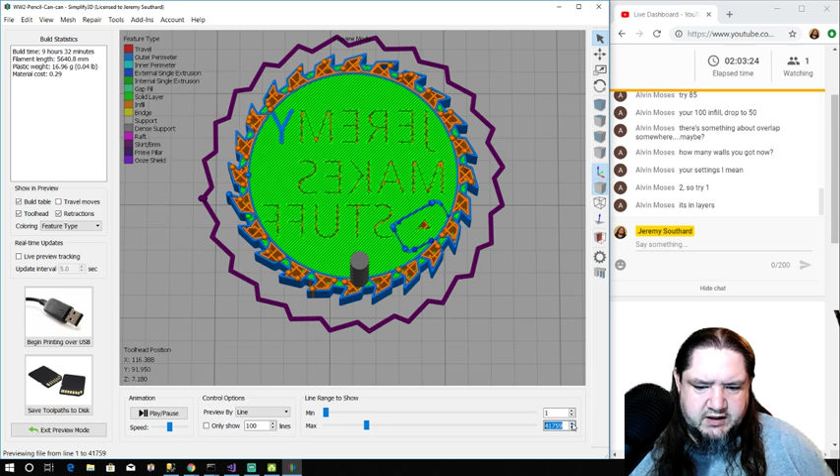Now see, these are the start and stop points of each spot on the letters, right? Because if I come back over here and show the lines - come on, there we go. So this is going to the print head - come on. It's just going to start and stop, if I can ever find the letter again.

Yeah, see that point where it's making that tall dot column thing - that's where it's starting and stopping, on the points, that's where the retraction is. Yeah, there we go, right at the letters. Little tiny Texas.

So Tiger says increase the whole model by 20%. Alright, let's go up to 120.

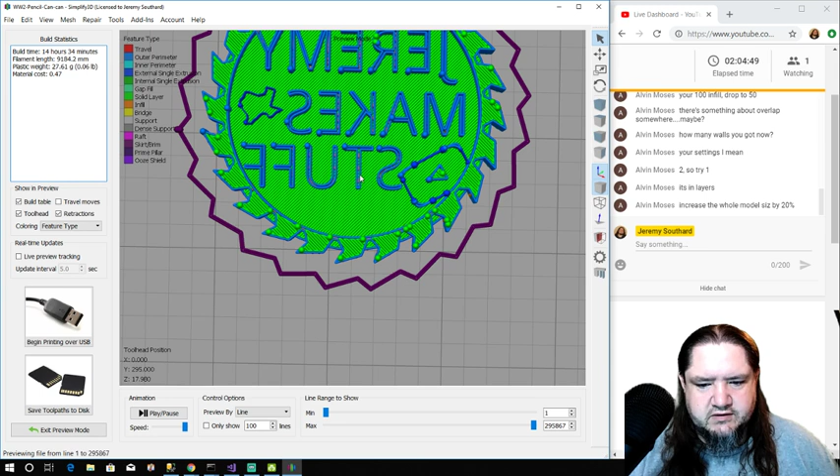Now the single outside shell of the letters is a little further apart, it still has that start and stop. Yeah, do a print and see - it really does add it.

Unfortunately, I've run into this problem before. Let's see if I have - it was even on a calibration cube. There was like a seam. I don't see it... let's see, was it on this model? Anyway, yeah, there's like a seam where it comes out, but alright, well, yeah.

I'll go back down to 100%. This is 9 hours now.

What did we change to make it 9 hours? Oh, I went back down to 0.1, so let me go back up to 0.3. That should all be fine. Okay, we're back to 3 hours and 43 minutes.

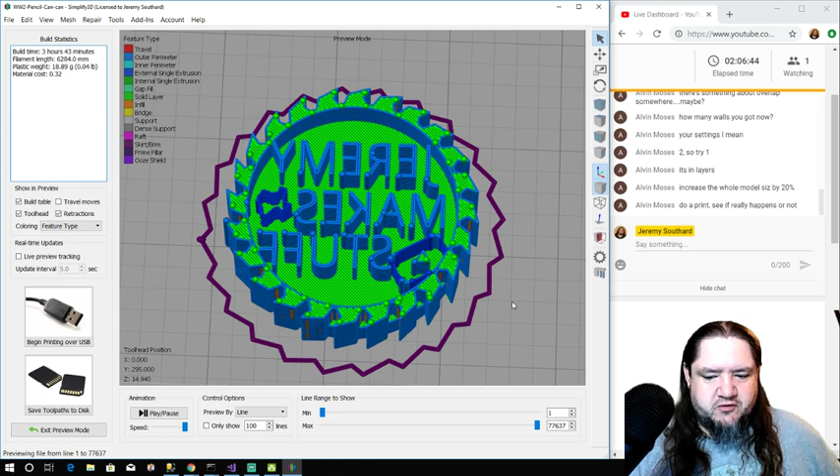Alright, yeah, I'll do a test print. Like I said, I've seen those bubble columns or whatever they are show up on prints before, but I don't remember if it was something thin or if it was part of the model. I think it wasn't the snake print, but anyway, yeah, I'll give it a print.

What is this brand? Jeremy makes stuff, and we'll see how it goes. Hopefully it won't be so bad. I mean, even if there is a little bit of extra something there, right?

I don't know how much it's going to show in the mold. I do have a smaller nozzle - I've got 0.1, 0.2, 0.4, 0.6, 0.8, and 1 millimeter. If I put a 0.2 on there...

Oh, look at that. Interesting.

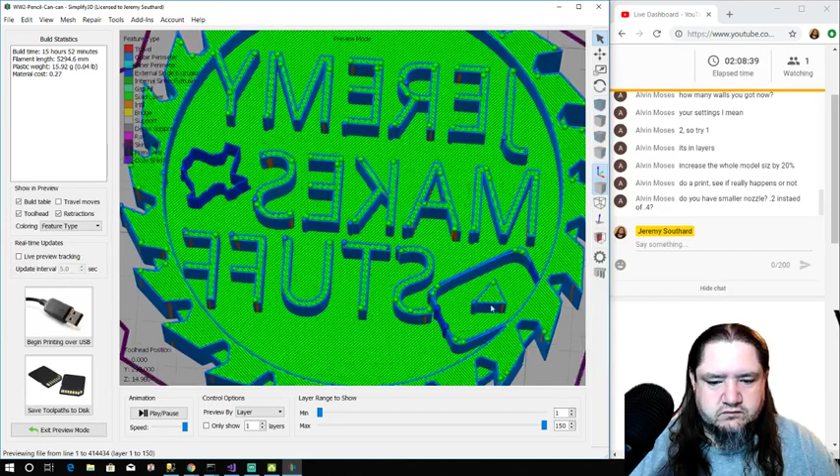I mean, it still has those bubbly columns, but they're a lot smaller, and now there's actually infill between the perimeters of the letters. Alright, let me save that as well.

I have the other nozzles, but I haven't put them on yet. I've never tried - what is this, 0.2 nozzle - I haven't tried the different sizes. Now, Tiger, I know you got some other nozzles. Have you tried the different sizes on your Ender 3 yet?

Save that process so that I know that's the one with that setting in it.

Alright, well, let's see, on the CR10, 0.2 was amazing, just slow. Yeah, I mean it went from almost a 4-hour print to a 15.5-hour print, just by switching that. It's a lot more lines, I guess, right? A lot of little tiny lines.